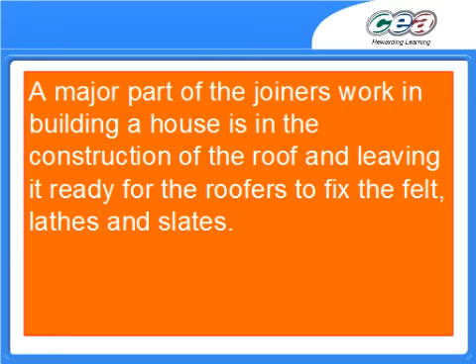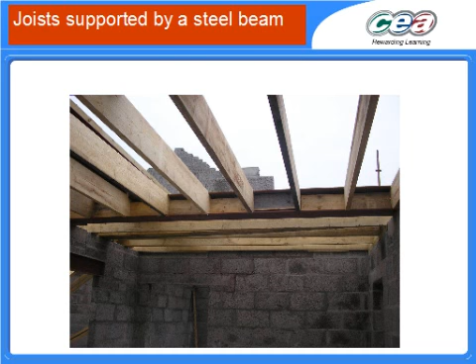Looking here at the work of joiners as the building of the house continues. Here are ceiling joists at roof level. They're very much like the joists on the ground floor, which form the floor for upstairs. These ones form the ceiling for upstairs.

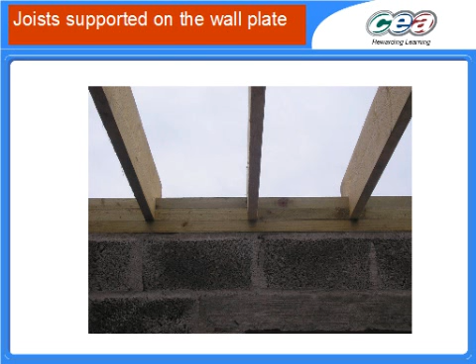Again, you can see how a steel beam is used to span a large gap, and also you can see how a wall plate is used to support the joists and fasten them to the top of a wall. There's another steel beam in place. Again, they're necessary in places because of the strength needed.

You can see quite clearly here what it means by a cut roof construction. These are not prefabricated trusses. They're individual pieces of timber which have been lifted into place, cut where necessary, jointed where necessary, and fastened together to make up a strong roof structure.

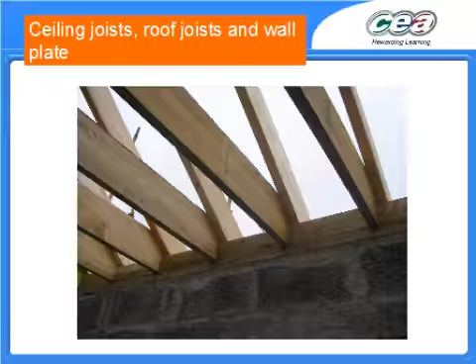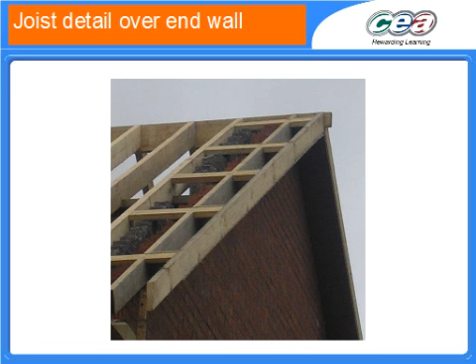Here you can see the structure beginning to come together. Right across the middle of the structure you can actually see a very strong steel beam in position. Now this is the detail over the end of the wall. The roof, of course, is extended beyond the wall in order to force rainwater and so on to drip well away from the wall and not wet the wall and thus come through to the inside.

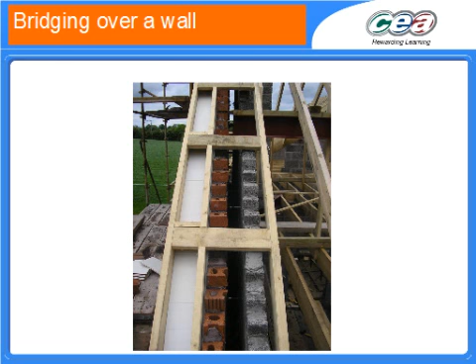You can see the same view, this time from above, showing how it bridges over the inner and outer skins of the wall. Valleys where two angles of the roof meet are very much vulnerable to water ingress, and so it's important that they're constructed very, very well and sealed very, very well so that water can't actually get in that way.

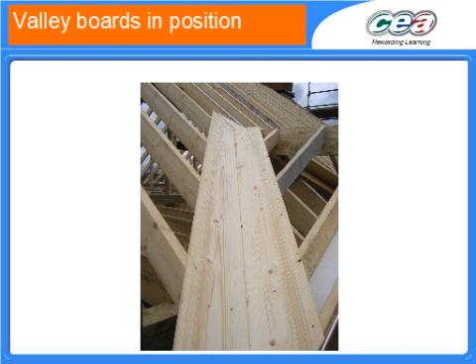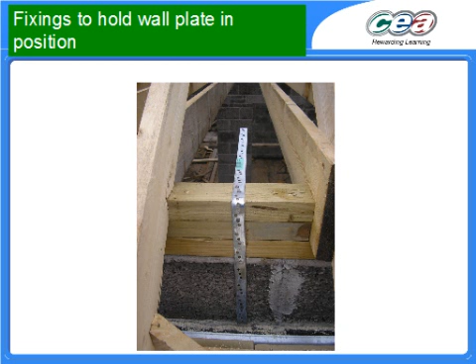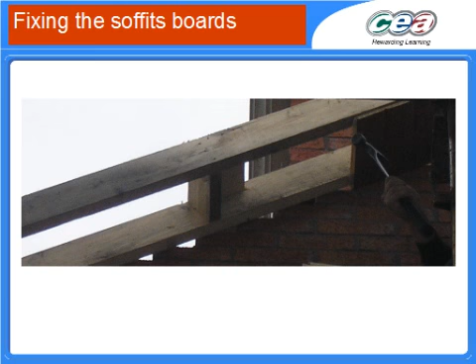Here you have fixings being held again, straps being used to hold the wall plate and the roof structure down to the walls. Again, this is because of wind loading. Soffits are fixed underneath the overhang of the roof. You need to remember that name, soffit boards. They're a trim, if you like, which hides anything unsightly and also seals up the roof.

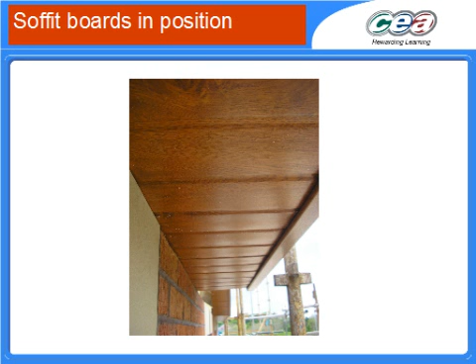Here's another view of the same thing with all of the soffit boards in place. They look to me like UPVC in this case, wood-grained but nonetheless UPVC. Fascia boards are fitted beneath the overhang of the tiles but sort of on the face of the end of the roof beams.

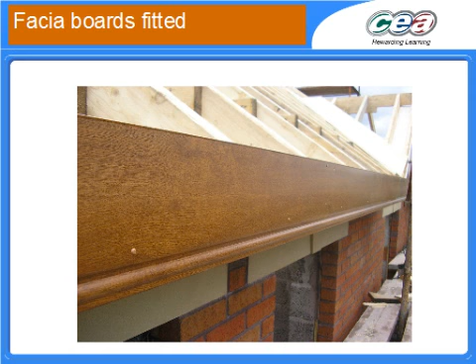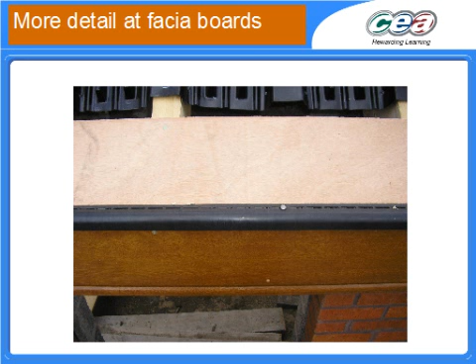And here we have more detail at the fascia boards. Notice the various plastic and rubber parts of the assembly which seal it and keep drafts and moisture out. However, you do need some ventilation, and this particular construction here is put in place to prevent roof insulation from being pressed up against the tiles and thus preventing any air movement through the gap.

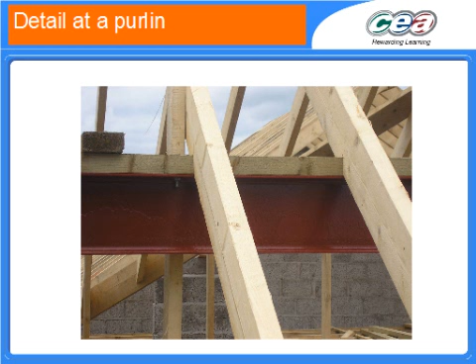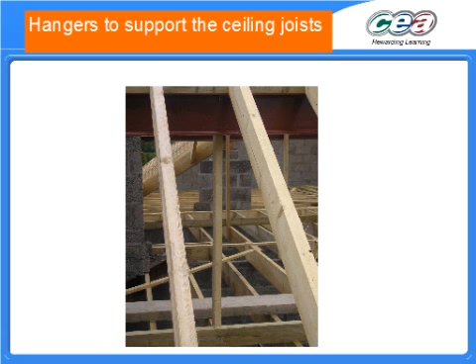Here's that steel beam I mentioned earlier. It's called a purlin once it's up inside the roof structure, and this is one of the key components holding up the whole weight of the roof. And you can see what a large beam that actually is and how much weight of tiles are going onto that roof. Now that vertical component there is not supporting the roof from below. It's actually a hanger which is supporting the ceiling up to that strong steel beam we mentioned a moment ago.

Here you can see barge boards. Now fascia boards go onto the face of the end of the joists, but not when it's on the end of the property. At the end of the property they're called barge boards. Here's a barge board with a soffit beneath it. Those three names are ones you need to remember.